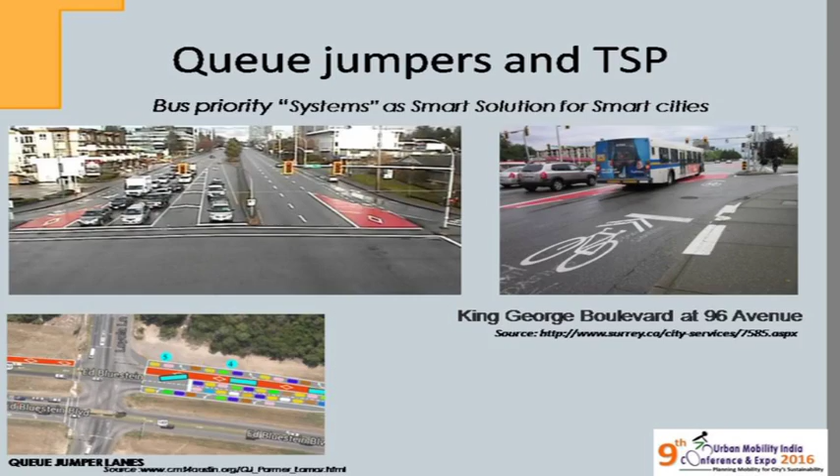We have poor policy and institutional framework in India, then limited financing and resources, deteriorating environmental quality, fuel consumption. So we just can't go with the metro in all of the cities. We have to augment the existing bus systems in Indian cities. So the Bottom Up approach, that is significant improvement in the bus services and operations basically, can serve as a smart transport mode in the upcoming smart cities having low ridership or low demand.

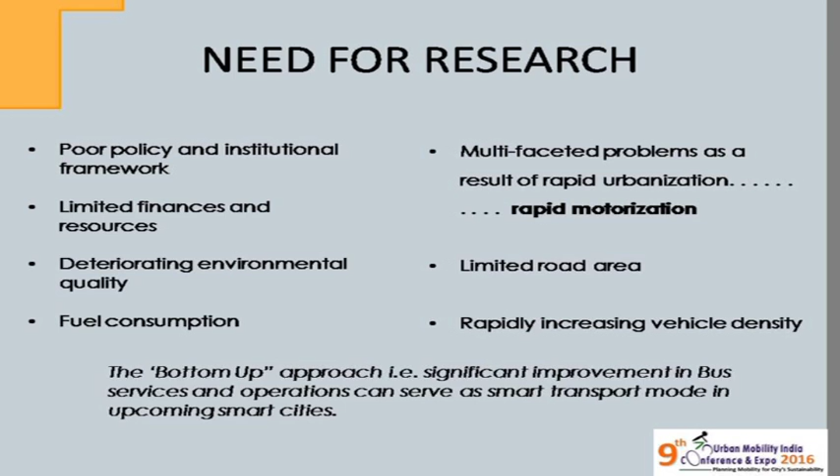So the study aims at the assessment of the effectiveness of the queue jumper lane and signal priority on the bus performance. Research objectives are: performance objective, assessment of the queue jumper and TSP, and second, using micro simulation model tool for bus performance improvement. So research approach is as follows: the review of literature and regulatory design, followed by primary and secondary data collection for model development, then scenarios generation and evaluation, followed by the calibration and validation of the model, then conclusions.

So literature review: for various bus priority systems, we can observe, for dedicated lane based system, improved level of service, travel time saving. So this queue jumper is also a kind of dedicated lane based system at a junction only if we are having space constraints. Then the scale of projects can be strategic at a city-wide level, then mesoscopic, that can be a grid of streets, and microscopic, that can be few junctions. I have taken various evaluation parameters like travel time variability, delay, headway variability, and incidence of the variability.

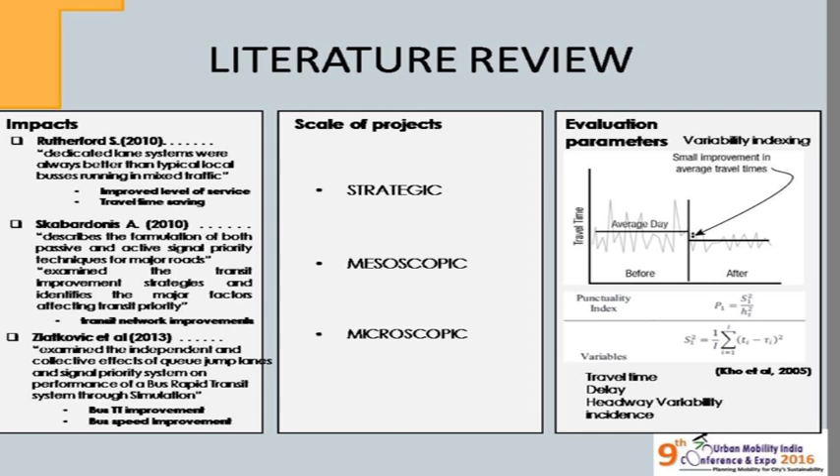Various authors have done assessment of the queue jumpers. The first one, they have assessed different signal priority strategies, fleet size, volume, detector locations just before the junctions, then dwell times and bus stop locations. Then the second one, they have simulated the 13 intersections and transit travel time. They have observed the reduction of 13 to 22%. Then in 2013, they have modeled 6 signalized junctions, and reduction in delay was observed by 30% along the corridor.

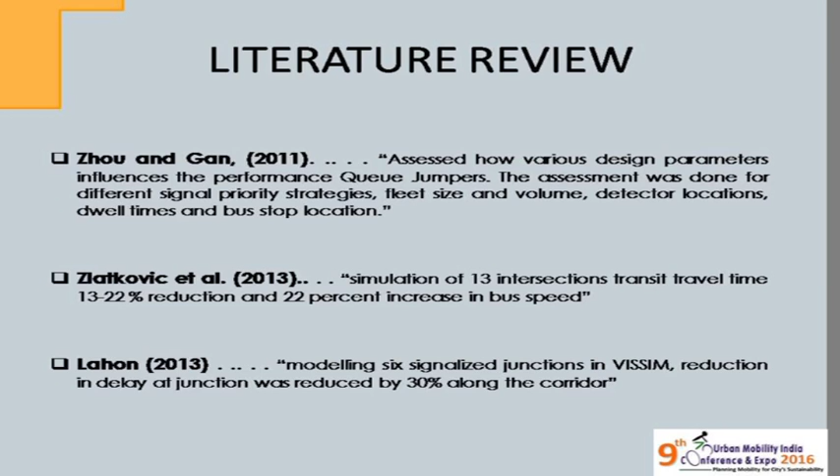So next is the model development. The first one is the test corridor, which is from the Shivranjani split flyover to the APMC road junction in Ahmedabad, that is a part of 132 feet ring road. Number of lanes are 4 on each side. Currently no segregated bus lane is provided.

The land use is predominantly mixed use, and there is a proposed prioritized bus plan that can be a BRTS or BRTS augmented with signal priority, and this will serve as a feeder to the proposed metro that is coming over here from APMC road junction to the Jivraj Park, then metro goes over there. So total junctions are 8 and signalized ones are 4. That is the first one, Premji Nanji Crossroads, then we have Shyamal, Jivraj Park, and APMC road junction.

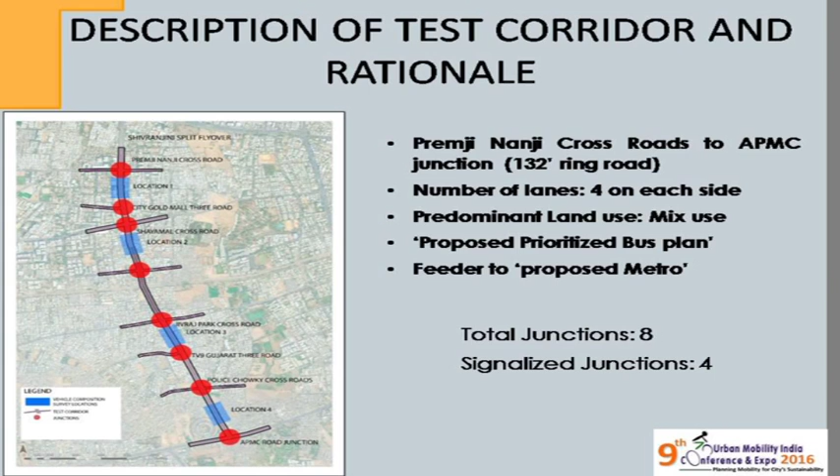So the Vissim model development involved pre-modeling work that included data collection, followed by model preparation that included network creation of network elements, origin and turning volumes at the mid blocks and junctions, then traffic composition and defining the vehicle types, defining parking areas and duration, signal phasing programming, and inputs to the driving behavior that are Indian.

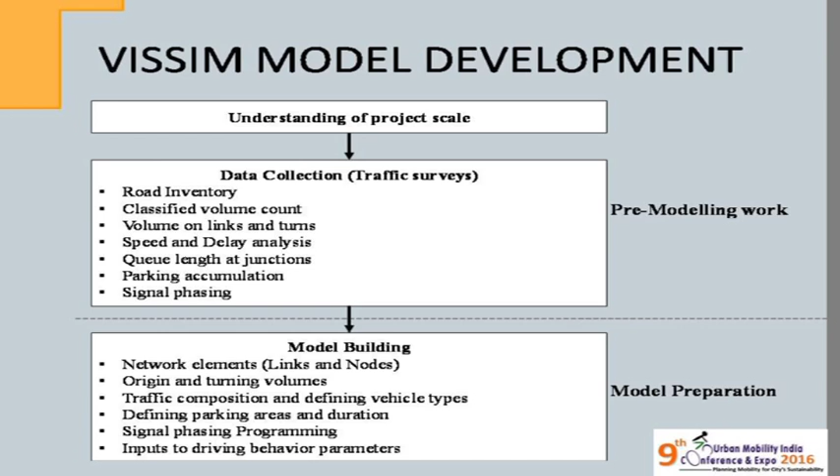Followed by the basic model development, we have multiple simulation runs to obtain speed-based results and volume-based results. So we have a multi-criterion approach for the calibration of the same. And if you compare that with the field results, and that is within the confidence limit of more than 95%, then we have a calibrated model and we can generate the scenarios. And this model can be used for various applications.

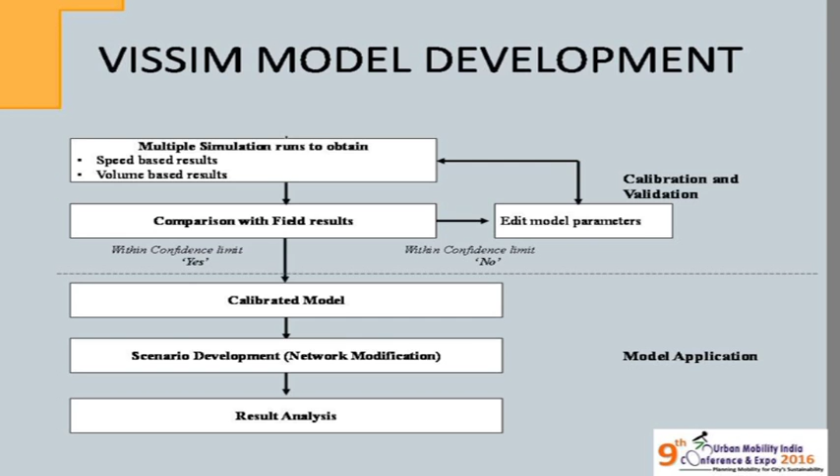So the calibration process involved various trials with the Wiedemann 99 parameters. First, we have taken the default parameters and all those default values for the standstill distance, headway time, follow variation of the vehicles, general behavior that shows lane rule, desired position at the middle of the lane, and then lateral distances that is unticked, and for various desired speed distribution, default values were taken. But the results we can observe in the validation process.

The trial second onwards included the modification of look ahead distance, look back distance basically, and the standstill distance was reduced to 0.2 to 0.9. The values were varying, various iterations having different values. Then the headway time was varied, follow variation was varied. The general behavior was not simply the slow lane rule. It included slow lane rule or simply free lane selection, and desired position as observed in Indian condition would be middle or any. Then desired speed distribution varied iteratively, and maximum being the free flow speed at the low volumes.

Then trial 7, for this we found the calibrated model, validated model having a confidence limit of 95% or more. The value for look ahead distance and look back distance was 20. The standstill distance was 0.2, headway time 0.9, follow variation 2. General behavior was free lane selection, and desired position at free flow was any position in the lanes. The desired speed distribution, lower bound and upper bound values were as follows.

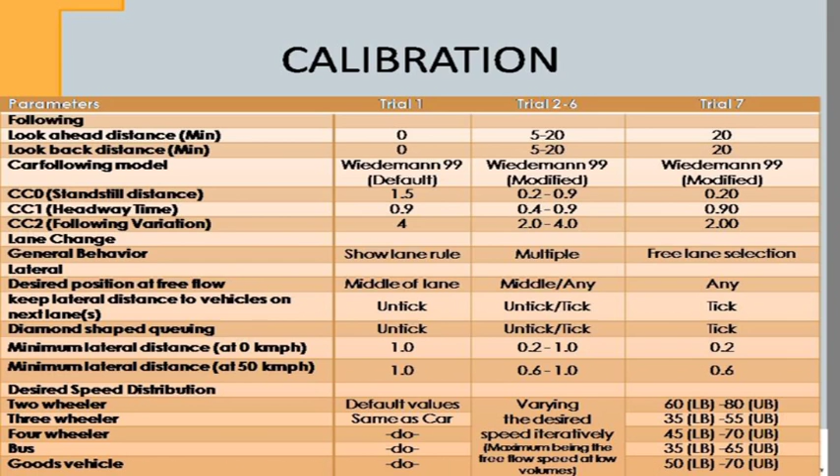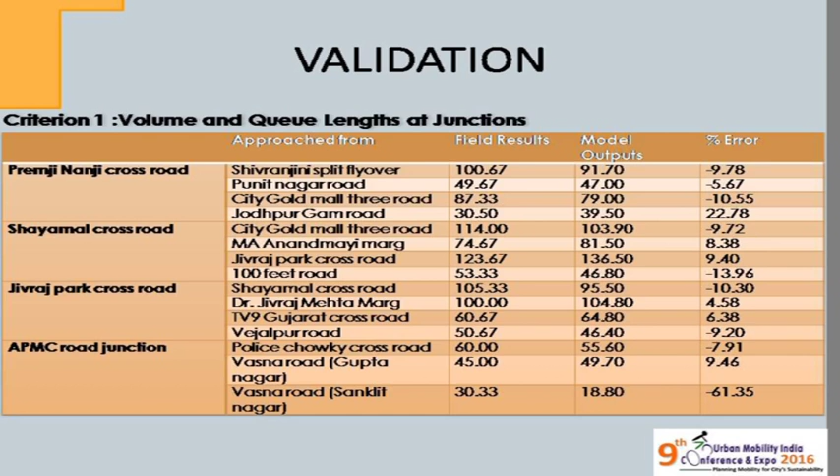So the first criterion was the volume and queue lengths at the junctions. So we observed the field, we have the field results and the model outputs, and we observed the percentage error. So these are the queue lengths we have calculated out of the model, and these are the field results, and percentage error can be seen. So the roads or the links along the corridor, those were having a percentage error of values less than 10.

The second criterion was the travel time and delay. That was link wise, because this corridor has a comprehensive kind of structure, like a free flowing speed from the highway till the Jivraj Park crossroads. Then we have an elevated section also. Then we have a wide section from Jivraj cross junction to the APMC. So we have to validate the results of travel time and delay link wise.

So we have the field results of the travel time and model. So the residual error, the maximum can be seen as -11. So that was within the confidence limit. So based on that, we have a calibrated and validated model.

We developed the scenarios. We have a base scenario which represents the base network, curbside bus stations, and no signal priority is given currently. Then we have a queue jumper, and queue jumper will only be effective if we are having an active signal priority. Otherwise, if bus can't maneuver through the traffic, it can't get a signal priority, and this queue jumper won't be effective. So in this case, we have a queue jumper at the junctions and curbside bus stations.

Curb extensions are provided over here. So curb extensions is another bus priority measure taken, so that the time taken by maneuvering till the last lane is reduced. And signal priority given over here is vehicle actuated signal priority. Detector detects the bus just approaching the junction, and it provides the green signal to that.

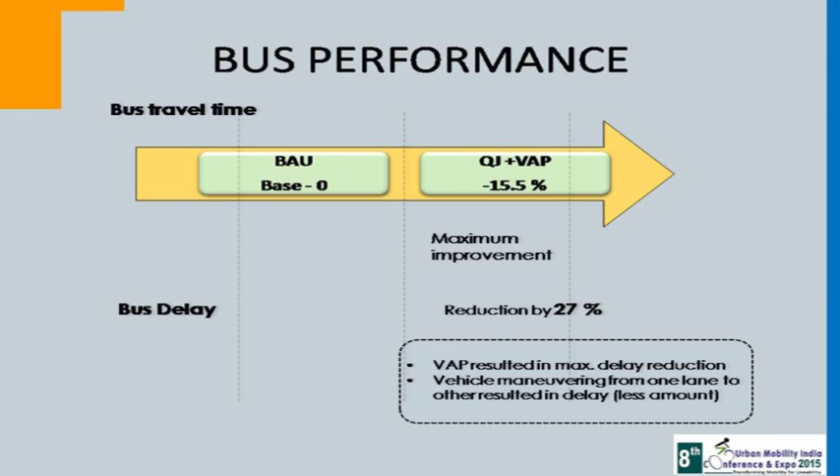And secondly, vehicle maneuvering from one lane to another resulted in delay. That was a very small amount. And if we provide the passive signal priority, that can only work if the traffic is quite high, V/C more than 0.8, and the bus is taking more than 2 cycles to cross the junction. Only then is it effective. Otherwise, VAP, that is vehicle actuated priority, shows maximum improvement.

Then we have the travel time variability of the various vehicles for the time we have run the simulation. We can see the variation of minus 88 seconds to 158 seconds. That is huge. That is plus minus 30% of the variation from the scheduled timing. Whereas in case of queue jumper and vehicle actuated priority, the variation is quite less, 0.5 to plus 10 variation. That is just 19 to 28 seconds.

Across the corridor, we can see how the vehicle is behaving or where it is getting the maximum. Like in the first case, the red one shows the junction. So this is Shayamal Crossroads. It shows the large variation in junction delay. Like in this case, we have no delay. It got green, and here it has got a full red cycle over here. Then this gap basically is the deviation from the scheduled headway.

So at the end, we can see there is large variability in case of business as usual, and there is maintained headway in case of queue jumper and signal priority. The headway variability across various stations can be observed. These are various bus stations.

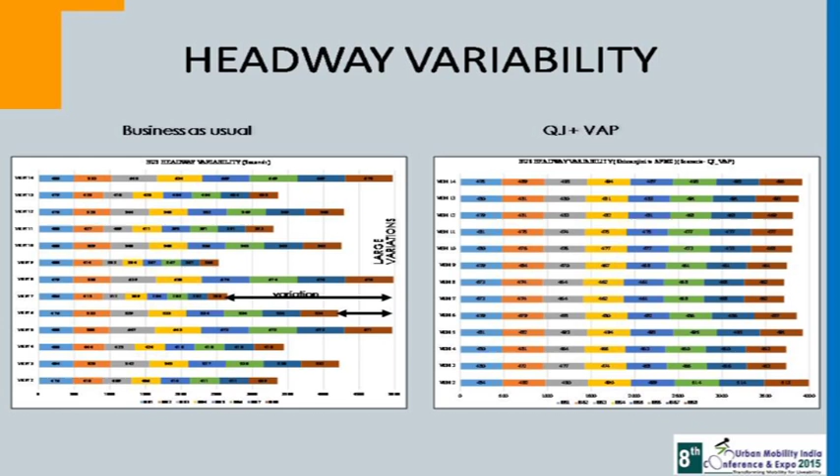Then we assess the impact of increase in traffic, whether the queue jumper is effective in case of increasing the traffic for V/C more than 1. So for increase of 5%, 10, 15 up to 50, we have observed there is an exponential increase in the queue length. Because every time the bus is getting green, if we are increasing the bus frequency also, we are getting huge queue lengths of the private vehicles, and it surpasses the queue jumper lane's length. So the bus can't even get into that queue jumper lane.

So this solution can be a short-term solution or can be a solution to the feeder system that is running at the periphery, or some kind of feeder to the mass transit system. So the queue length extends over the previous junction also, like in this case we can see. So the bus cannot cross this junction and this one, so the delay for the bus also increases exponentially.

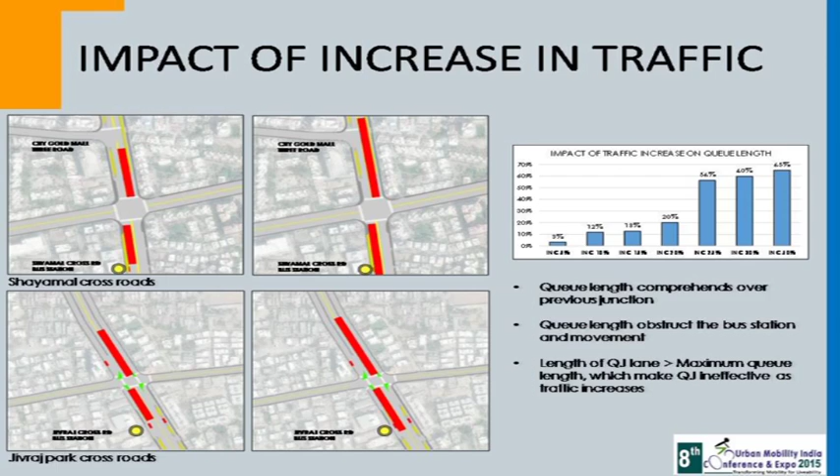So we can conclude queue jumper lanes have to be provided with active signal priority, and in the short term the results are comparable to the buses running in the segregated lane, that is BRT, provided without any kind of signal priority. Then in the long term, the delay and travel time increase exponentially, both for bus as well as private vehicles. There are worse impacts on the private vehicles itself, and overall there is poor network performance.